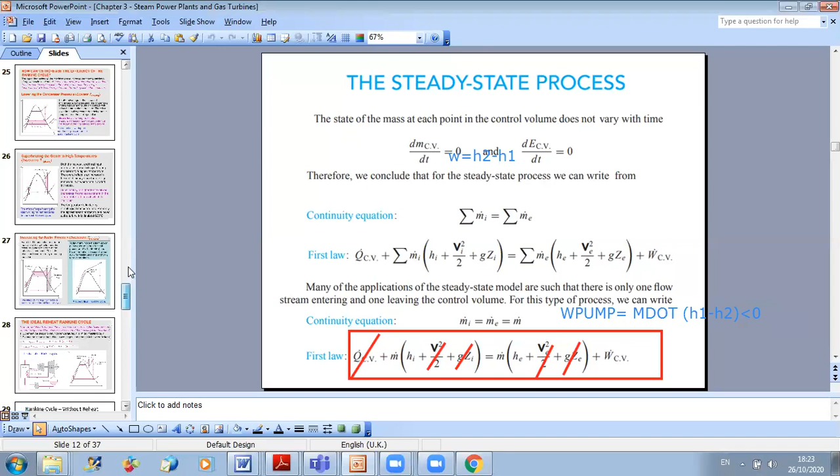So the whole idea is to apply this formula for all the components of your system: the pump, the turbine, the boiler, the condenser. If we go back to our cycle, as you can see here, because they are just putting minus W pump after, they are taking the absolute value, which is H2 minus H1.

Now for the boiler, what is happening? As we said, in the boiler we have exchange of heat and no work. So for the boiler you can say that Q in is the difference in enthalpy between 3 and 2. Going back to the previous equation, with no work and negligible variation of kinetic and potential energies, you can write that the boiler heat entering my system, Q in, is the difference between enthalpies at point 3 and 2, so it's H3 minus H2.

Now for the turbine, what is happening? I am producing work, so this is positive work for me. This is why for the turbine I write the same equation as the pump, and I end up with W turbine equal to H3 minus H4. Finally, for the condenser, what is happening is that I am losing heat, so I have Q out as the difference between H4 and H1. Just a small note for you: here they are considering only the absolute values.

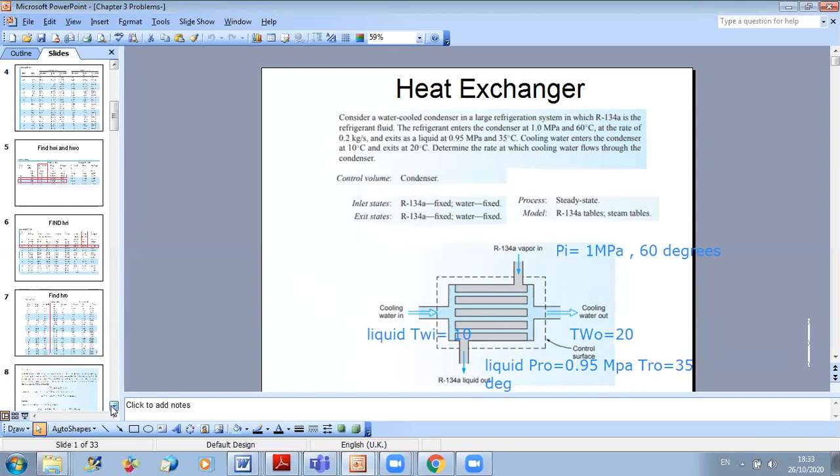If I write the first law of thermodynamics, let us see it here. We just apply the relation we have seen together. Always go back to this relation. This is the main relation you will use.

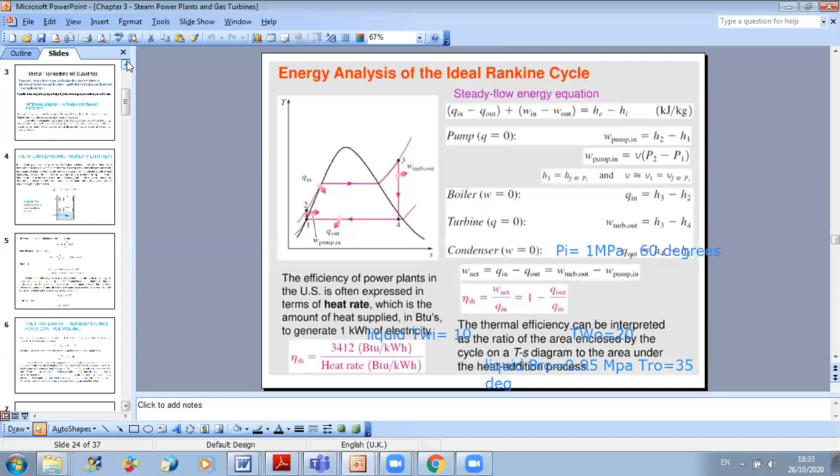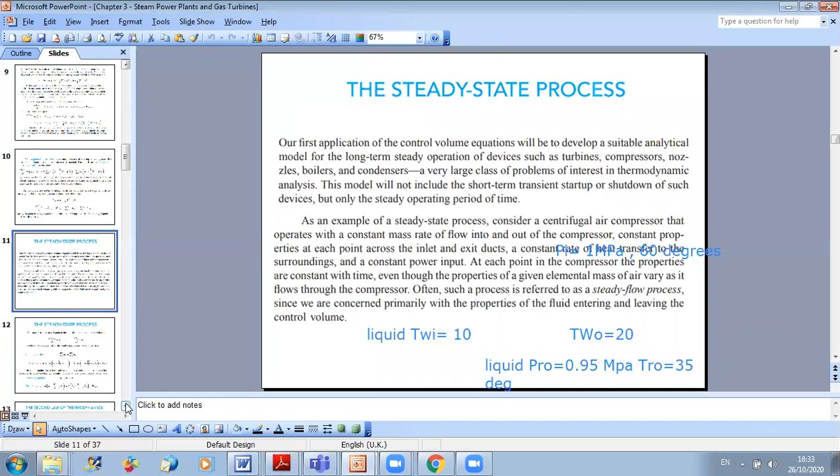In this heat exchanger problem, what are the terms that will cancel out? First, in a heat exchanger you have exchange of heat, no work produced, so this term will cancel out. Also, as I said before, when they don't mention anything about potential and kinetic energies, you can neglect them.

But pay attention here. You should not use this one, you should use the previous one. Why? Because you have several inlets. When you have several inlets or several outlets, you should use this relation, not this one. This one is only for one inlet, one outlet. But for the heat exchanger we have seen, you have two inlets and two outlets.

So I will use this relation, and as we said, no work, so it will cancel out. If I consider the whole system of the heat exchanger, then heat is exchanged between the two fluids, so the amount one fluid loses will equal the amount the other fluid gains. So Q will be 0 for the total system, because I'm considering both fluids in one system, not one of them.

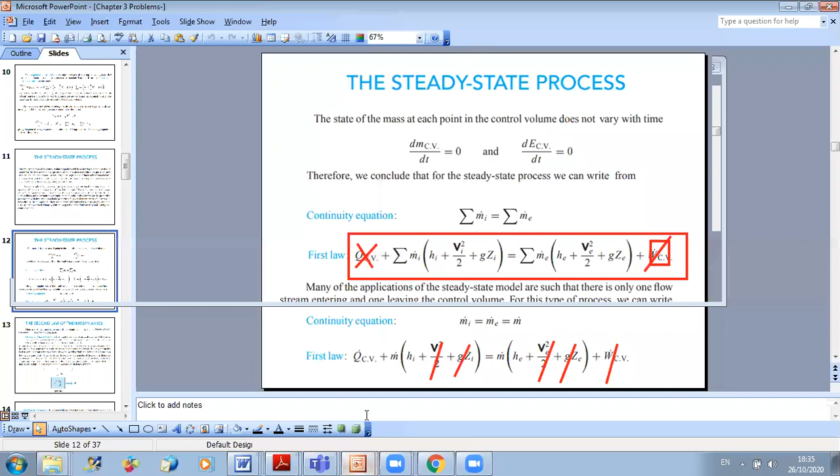Going back to the problem, the best idea here is to take the control volume, including the two fluids, like this. Because if you don't include both fluids, you add an additional unknown, which is the transfer heat rate between them. But when you take both, one is giving Q and one is taking Q, so plus Q minus Q will cancel each other. So the first law of thermodynamics for this heat exchanger can be simply written as follows.

So you have sum of m dot inlet times H inlet equal to sum of m dot outlet times H outlet. So the whole idea to solve this problem is to find the enthalpy of the refrigerant at entrance, the enthalpy of the water at entrance, and the enthalpies of water and refrigerant at outlet. I need to determine these four numbers to be able to find m dot water.

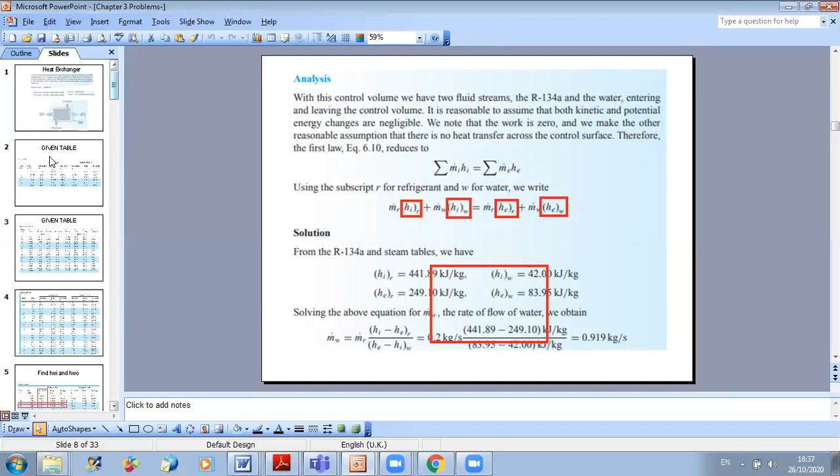To do this I will go now to tables, and here you need two types of tables. You need tables for water and you need tables for the refrigerant R134A. I already gave you the table here, but I will show you how to search for them.

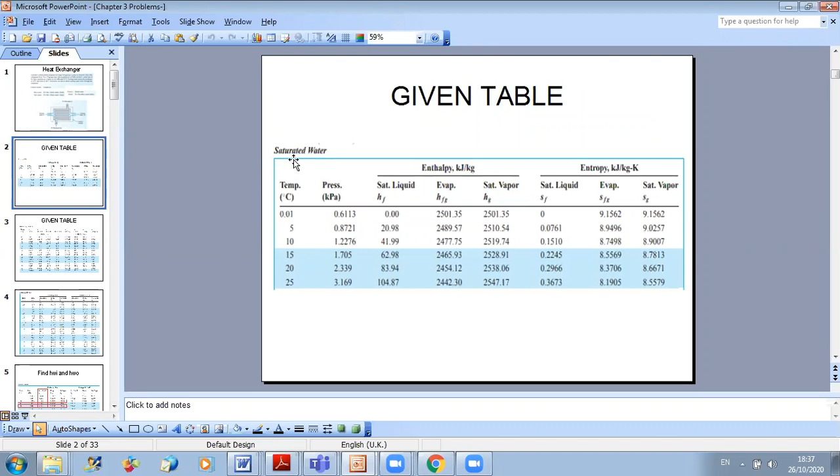Now, for the inlet state of R134A, they didn't mention if it's vapor or what, but I can make an assumption. I can assume it's a vapor. How can I verify this? I can go to tables and look at the case of saturated water, and look at superheated refrigerant R134A. Because if I assume, so here, what is my assumption?

I assume that the inlet of refrigerant has a superheated state, meaning I have vapor. How can I make sure of this? What are the conditions given for the refrigerant R134A? Always look, when you look at a table, you should look here. This will give you the description. This is for R134A, and this is for superheated.

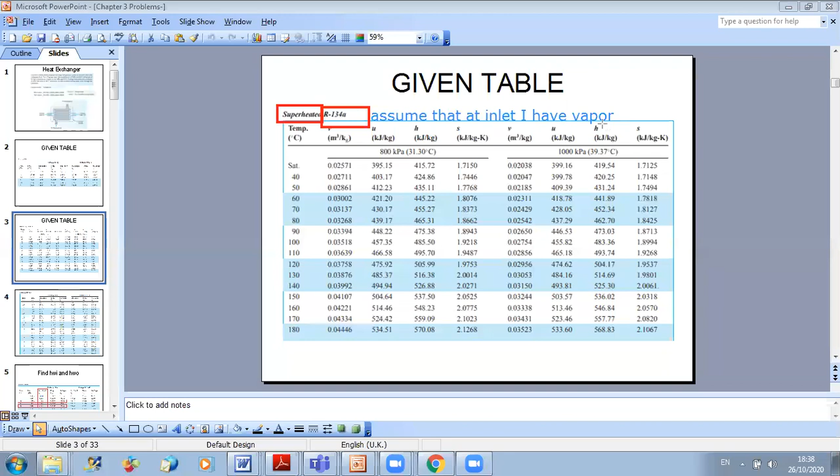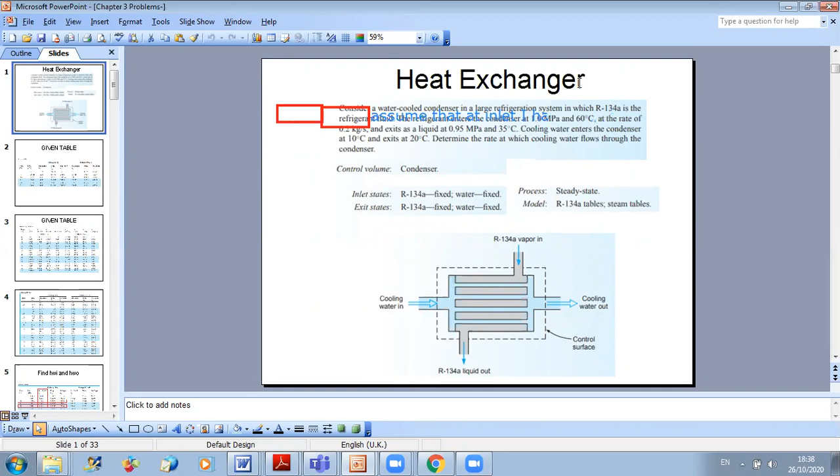So this means I am dealing with vapor phase. To verify this, the condition at inlet for the refrigerant are 1 megapascal, so I have 1 megapascal at 60 degrees.

If I look in this table, when you are dealing in the superheated region, they give you the temperature as inlet and you have pressure here. So for several pressures, they compute the different thermodynamic values. What you are interested in here is 1 megapascal, which corresponds to 1000 kilopascal. And always near the pressure, they tell you what is the corresponding saturated temperature. So for 1000 kilopascal, the saturated temperature is nearly 40 degrees.

But what you want is 60 degrees. This means that you are in the superheated region, because 60 is higher than 39.37. And as you can see here, for 60 degrees and 1 megapascal, the value of the enthalpy is 441.89. If your assumption was wrong, it's not a problem.

For example, if the temperature is 30 degrees and you go to the table of superheated R134A, you can see that 30 is smaller than the saturated temperature, which is 39.37. So you can say I am in the saturated phase, and I should look for the quality. So I should find the quality, and we will see how to do it.

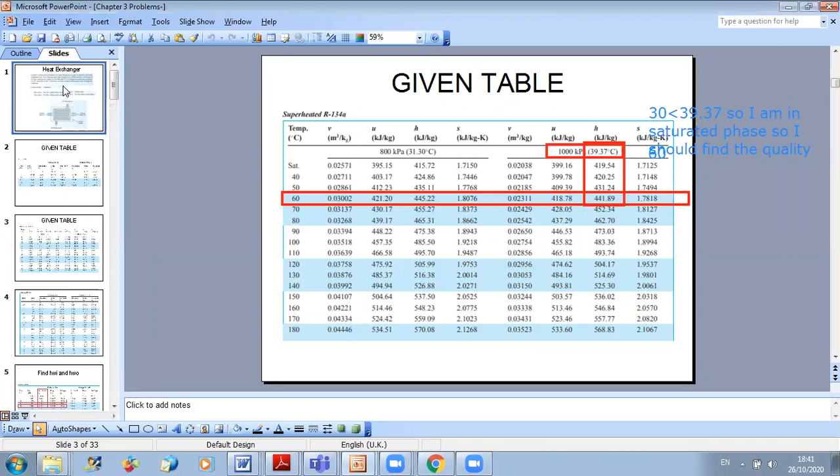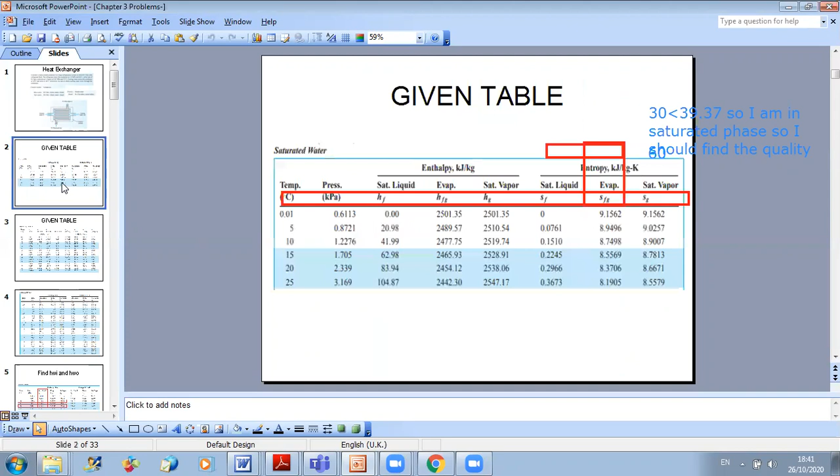Now at outlet, what were the conditions for outlet? They told us that it's a liquid, exiting as a liquid at 0.95 megapascal and 35 degrees. So I should go to tables and try to find the table for R134A in liquid zone or in saturated zone.

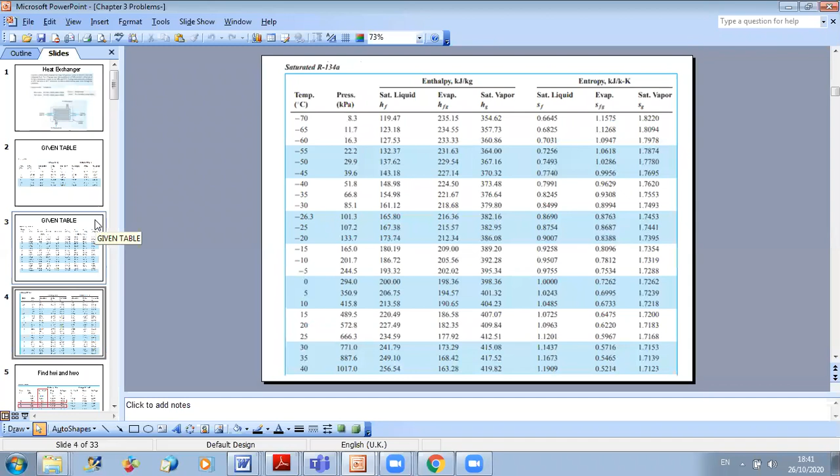It depends on what I can find in the thermodynamic tables. In some cases, when you have a liquid, you have what is called compressed liquid tables. But sometimes if they don't give you compressed liquid tables, this means that if you have a liquid state, you can assume that you can go to the saturated table and take the value at saturated liquid. So I repeat, in general, they give you compressed liquid tables and saturated tables.

But sometimes if they don't give you the compressed liquid table, here, for example, they just give us the saturated table. Then you can take that the value will correspond to the saturated liquid value, assuming that it will be close to the compressed liquid value.

So here at the outlet, what were the conditions? They told us that the pressure is 0.95 megapascal and the temperature is 35. Look here, 0.95 megapascal is nearly 950 kilopascal. It is close to this value, which is nearly 900 kilopascal. So our assumption can be done. We can assume that we can take the saturated liquid value.

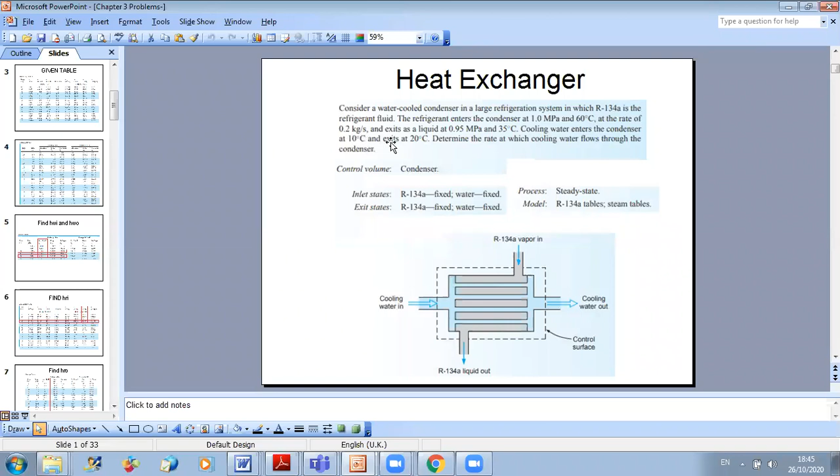So you will go to the saturated table and look at values of H at 10 degrees and at 20 degrees. You can find them here. I take the 10 degrees line, the 20 degrees line, and for the column of HF, I find that HF at 10 degrees is 42, and HF at 20 degrees, enthalpy at saturation liquid, is 83.94.

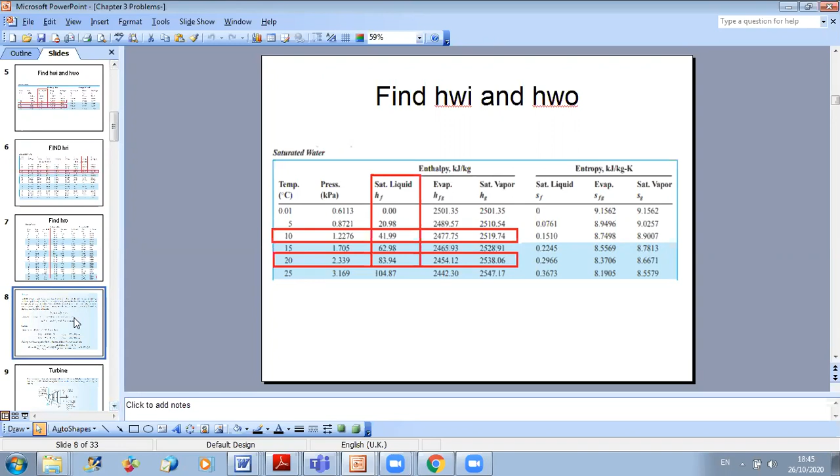Now I have all enthalpies of the four states. So all I have to do now is go back to my first law of thermodynamics and replace back the different enthalpies. Then my only unknown will be the mass flow rate of water, which I can calculate.

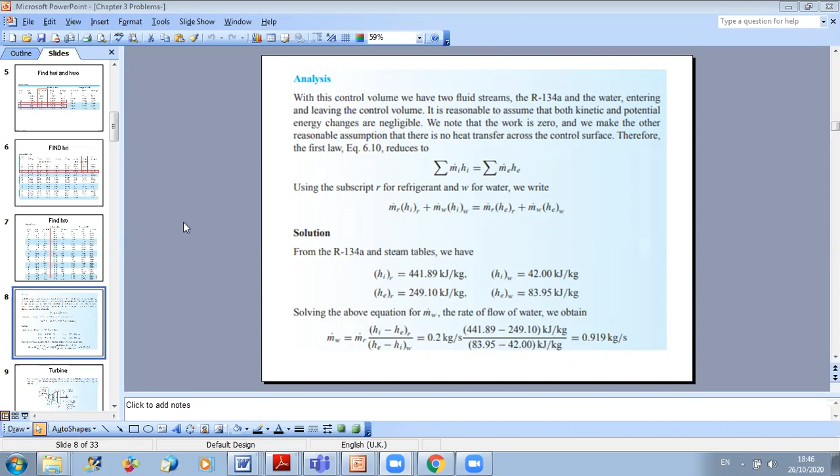Okay, so let us now take another component, the analysis of another component, which is the turbine. The mass flow rate into a steam turbine is 1.5 kilogram per second, and the heat transfer from the turbine is 8.5 kilowatt. The following data are known for the steam entering and leaving the turbine.

Okay, so in general, for a turbine, always the inlet state is superheated vapor. So at least you know that at the inlet you should go to the superheated tables. Now, for the outlet, it depends on the cycle. You can have a point just at the saturated vapor or a little bit inside the curve. So in general, you should look at the saturated tables when you want to look at the outlet conditions.

Okay, now here, for example, I told you that at the exit, you have X. X is the quality. X exit is 100%. This means that I am just at the saturated vapor point. So I will go to the saturated tables to get H vapor at this point.

Okay, now we want to find... what is the question? The power output. Okay, we want to find the power output of the turbine.

In order to do this, we will write the energy, the first law of thermodynamics. Okay, but here pay attention for something. Here, as I told you, if they give you information about kinetic energy and potential energy, you should use them.

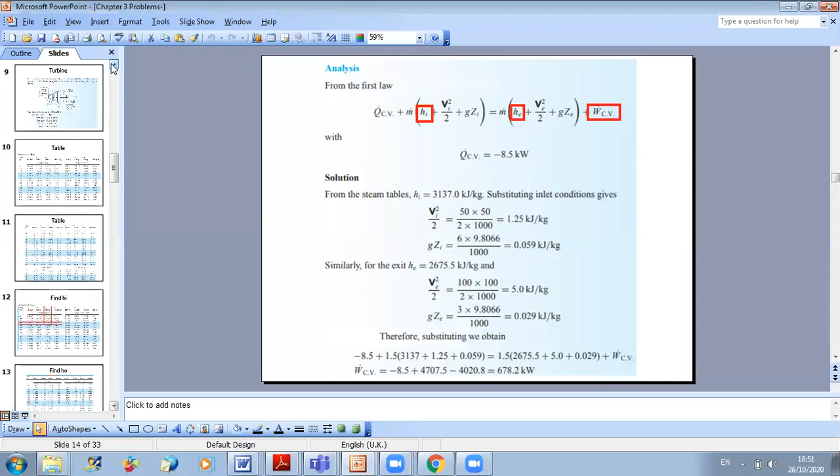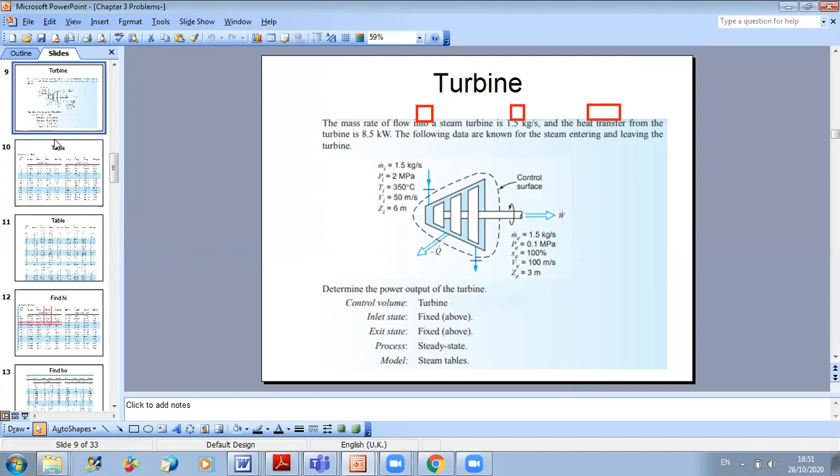At inlet we give the pressure and the temperature, 2 megapascal and 350 degrees. So I should go to tables and look where I have the table of superheated steam for 2 megapascal. If you go to your tables, look at superheated vapor water, and you have several tables.

You should look for the 2000 kilopascal, it is here. As you can see, as predicted, the temperature here is higher than the saturated temperature, which is 212.42. Our temperature at inlet is 350 degrees, so we go to 350, it's here. We take this line, and then we want to find what is the enthalpy, H. We can read here that the intersection between the two is 3136.96. So this is H inlet.

Now for the outlet, if you go back to the given, they told you that for the outlet, you have a pressure of 0.1 megapascal, and the quality is 100%. This means that you should take H vapor, Hg. So you should go to the saturated table because you have a quality, you are just in the saturated table.

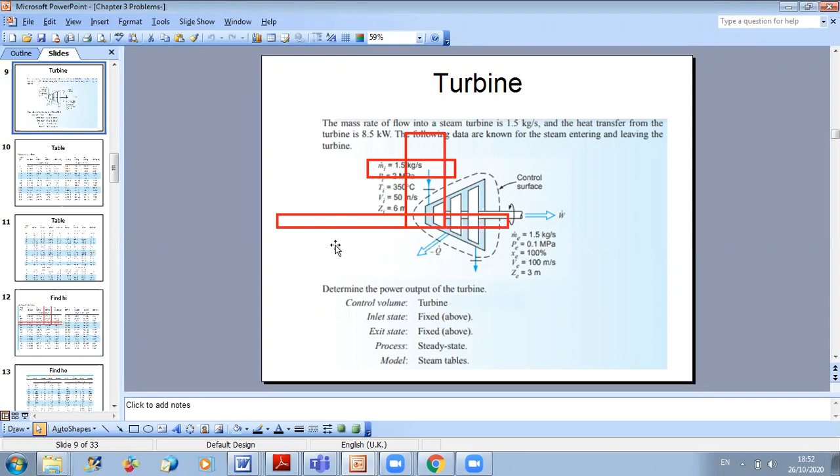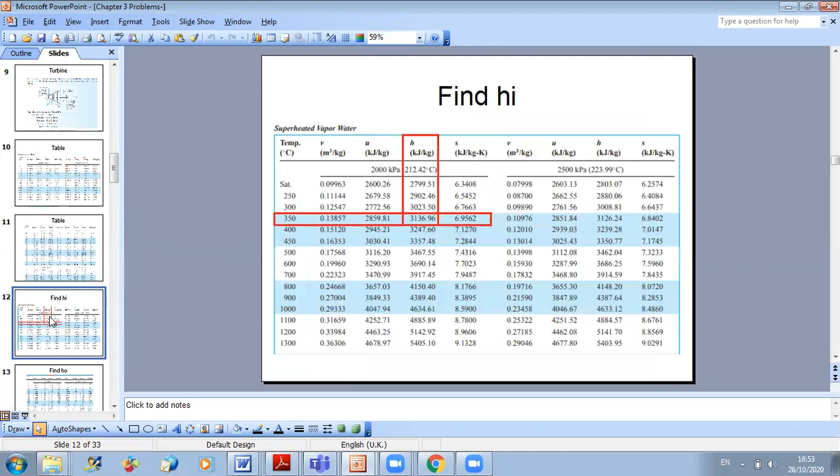If we go to saturated table of water, so here no, it's we are still in the superheated table. This is, yes, one second, let me check. So I don't know if maybe the table by error is not here.

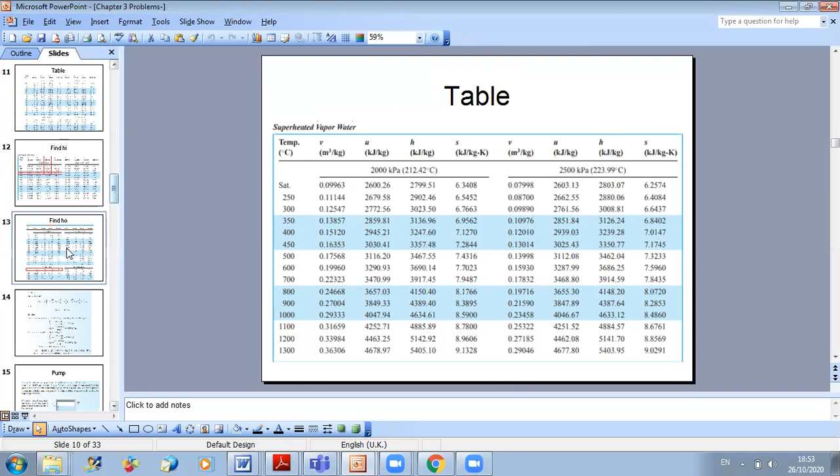Yes, one thing you can say is that for the outlet of the turbine, if you want, you can get it also from two states. You can get it from the superheated table, or you can get it from the saturated table. You know why? Because even in the superheated table, they give you the value at saturation.

As you can see here, for 0.1 megapascal, which corresponds to 100 kilopascal, you can read the value of saturation, because what is the value of saturation? It's equal to Hg. So here you can find Hg by two methods: go to the superheated table and just read the value at saturation, and you are here in the case of saturation because the quality is equal to 100%. So you can read the value of H corresponding to saturation. It's equal to

2675.46. Now if you want, let us use the second method: how to find this value using not the superheated tables, but the saturated tables. I will search with you to see the method. So let us go to the tables.

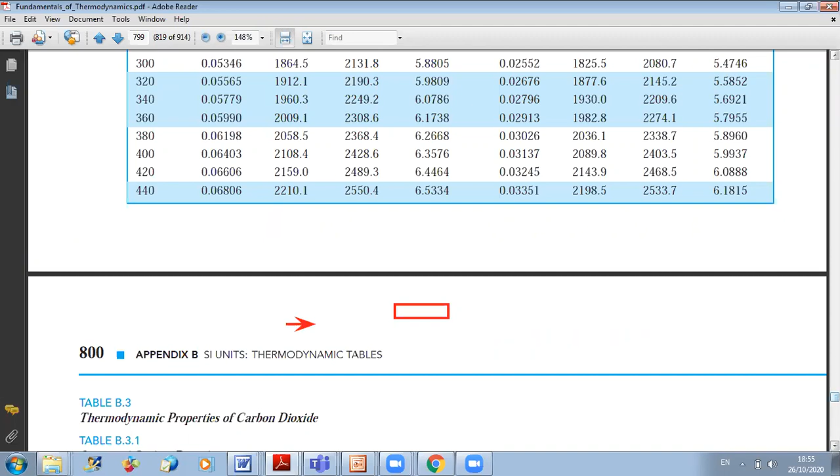Okay, so I should go to water tables. As you can see in water tables, I have a saturated water pressure entry and I have saturated temperature entry. But here, because I have the pressure, the given is the pressure, I will use, maybe they gave us also the temperature, so you can use either the pressure here or the temperature.

Since the outlet pressure is 0.1 megapascal, let us look here, it corresponds to 100 kilopascal. For example here, for this table, as you can see, they give you the specific volume and the internal energy. We don't want this, we want the enthalpy. So we will go down. Here for example, it's for saturated water pressure entry, and we have the enthalpy values.

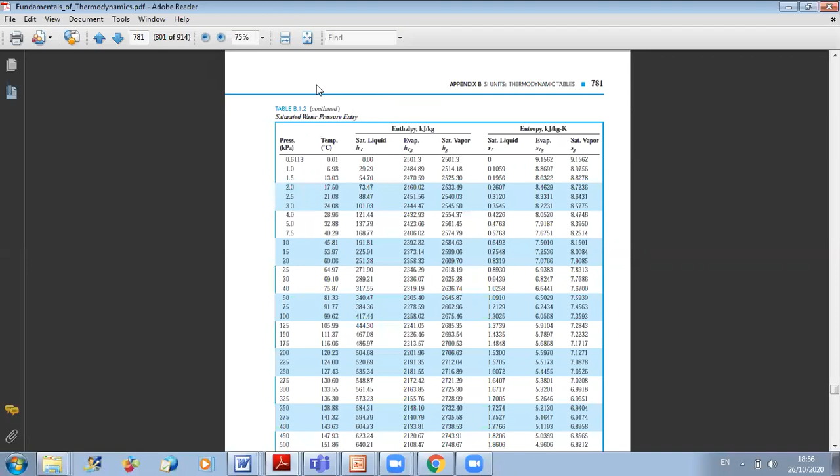So now we can search for the 100 kilopascal. This is the 100 kilopascal here, and I want to take Hg, the saturated vapor value. Hg, which corresponds to a quality of 100%, gives me that H is 2675.46. So if I compare with the previous value, it should be the same. Yes, exactly, here also I obtain 2675.46.

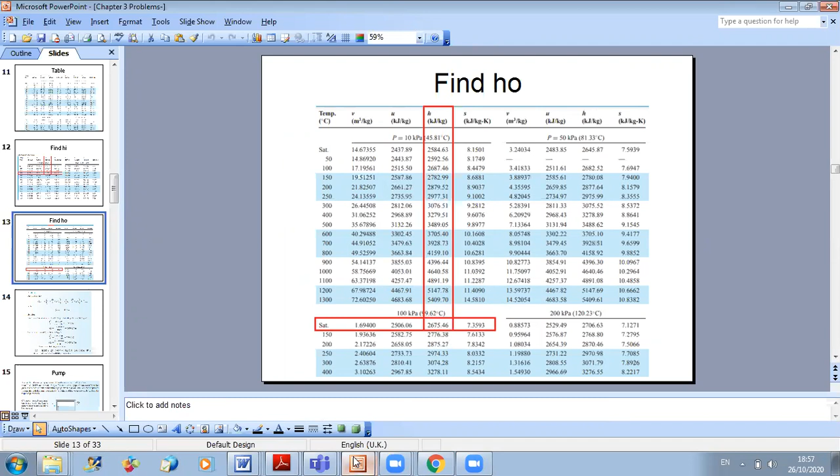So only for the quality of 100%, I can use either this saturated table or the superheated one. But for example, if the quality is instead of 100% is 90%, I can only use this table here, the table of the book. Then I will determine, depending on the quality X, knowing X, I can find H by knowing HF and HFG. We will do examples on this when I have the quality, how to get H.

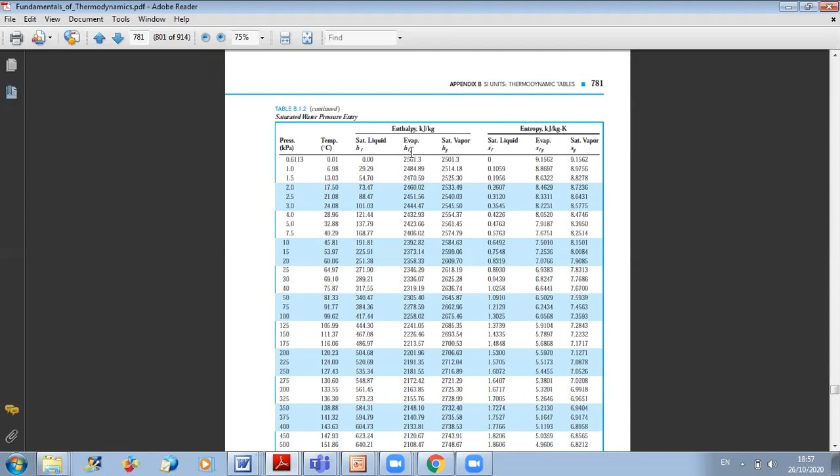Doctor, I have a question.